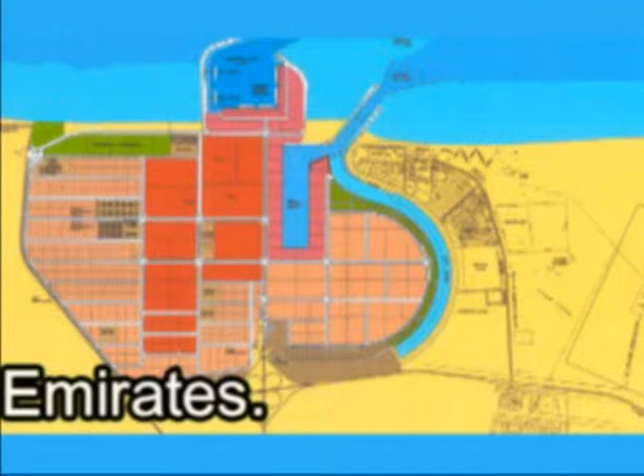Marine Engineering and Services commenced its operation in 1979 and has since extended its operation in 1987 by acquiring the docking facilities. We opened a branch in Dubai Al Jaddaf in 1990 under the name of Al Marine Engineering and Services. Now MES has acquired a new yard in Hamria Free Zone in Sharjah, where the entire existing docking facilities at Al Layya have been transferred. We hope for a brighter future and acquisition of business over here.

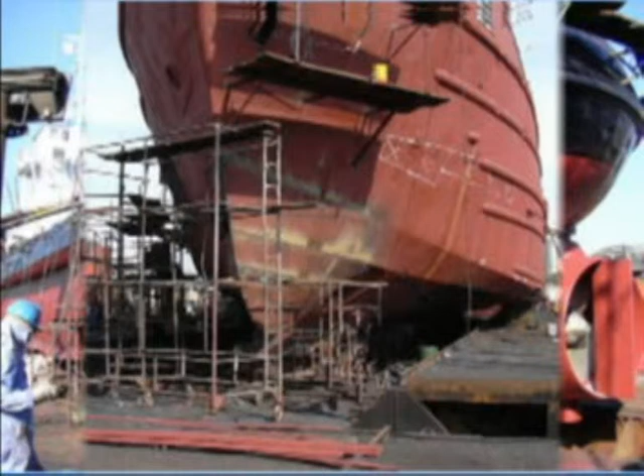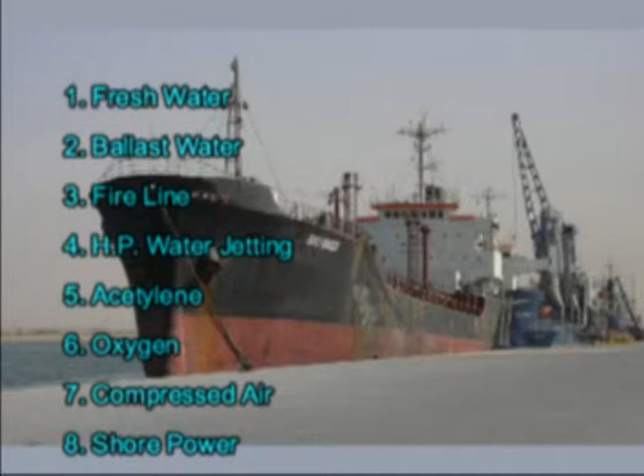Services at dry dock and repair berths. At the afloat repair berths: freshwater, ballast water, fire line, high pressure water jetting, acetylene, oxygen, compressed air, shore power, shock drainage, and tank cleaning.

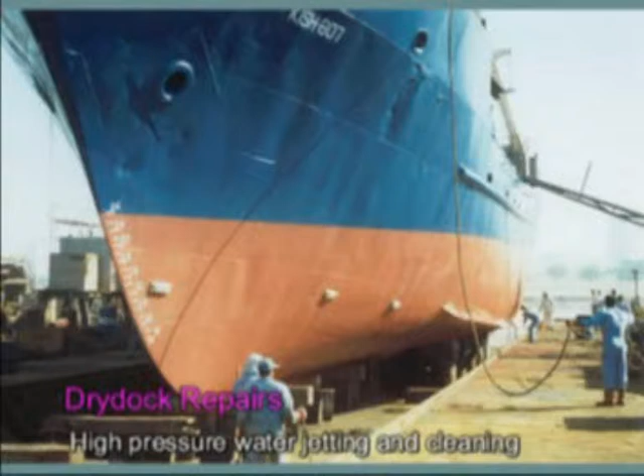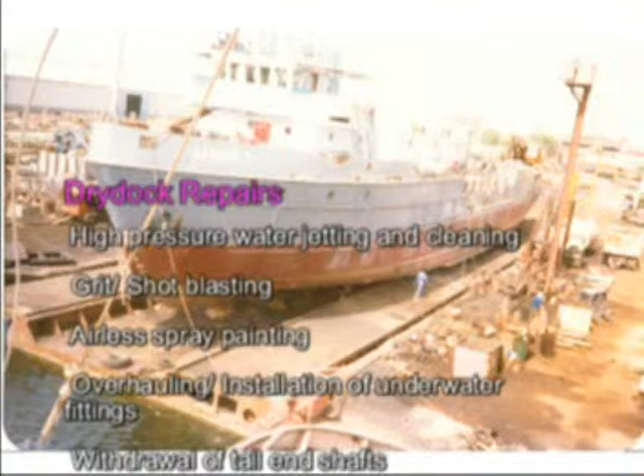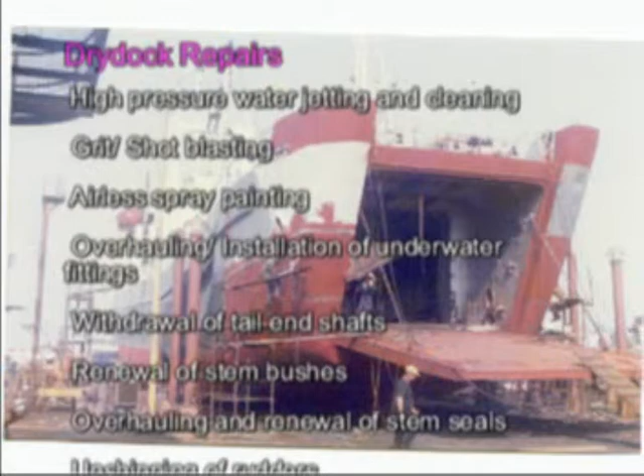Dry dock repairs: high pressure water jetting and cleaning, grit shot blasting, airless spray painting, overhauling and installation of underwater fittings, withdrawal of tail end shafts, renewal of stern bushes, overhauling and renewal of stern seals, unshipping of rudders, checking and correction of alignment, replacing of rudder bushes, replacement of anodes, installation and repair of cathodic protection systems, non-destructive testing methods including radiography, ultrasonic, X-ray and magnetic particle testing, annual intermediate and special surveys, and load line inspections.

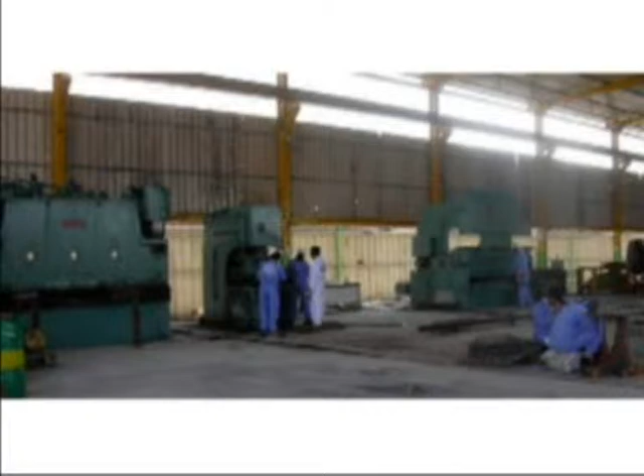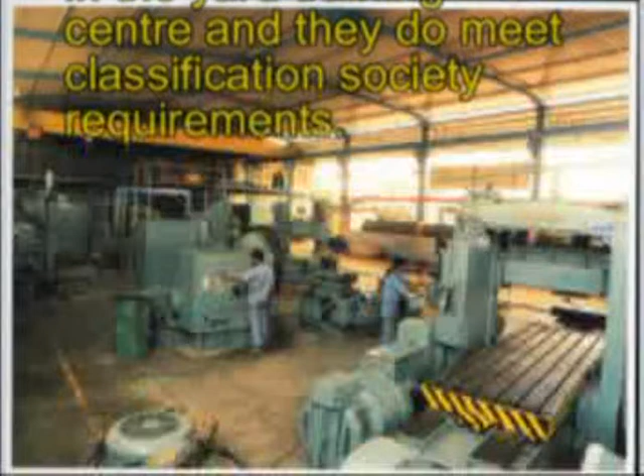Fabrication shops are equipped with submerged arc welding, MIG, TIG and MAG welding instruments, profile cutting machines, plate rollers and hydraulic presses. All these facilitate the speedy completion of steel renewal work undertaken. Our welders are trained in the Yard Training Center and meet Classification Society requirements.

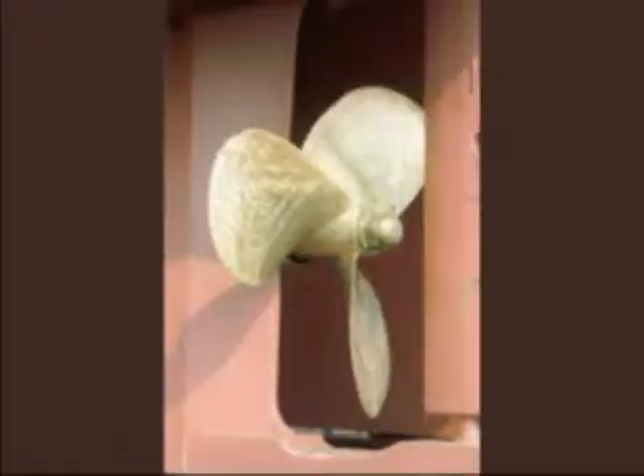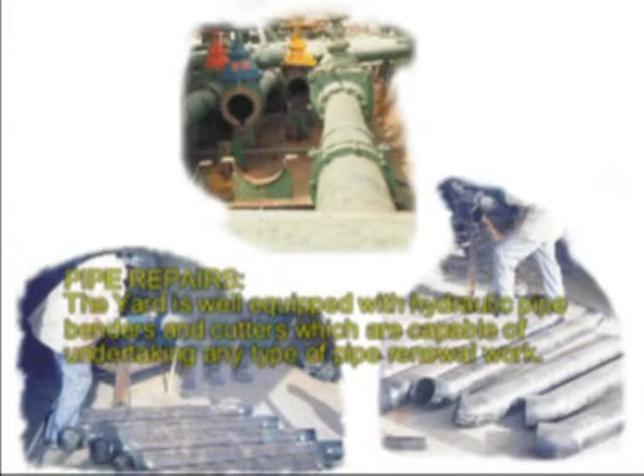Pipe repairs: the yard is well equipped with hydraulic pipe benders and cutters, which are capable of undertaking any type of pipe renewal work.

Electrical repairs: servicing and rewinding of generators and motors, replacing navigation lights and rewiring, installation and reconditioning of switchboards. Diving services: inspection of bottom damage and repair.

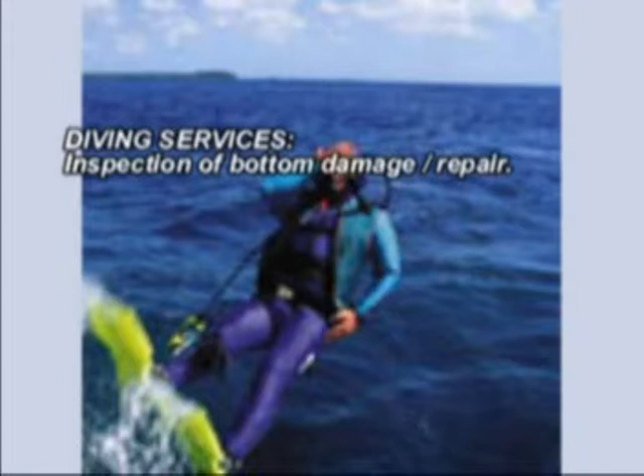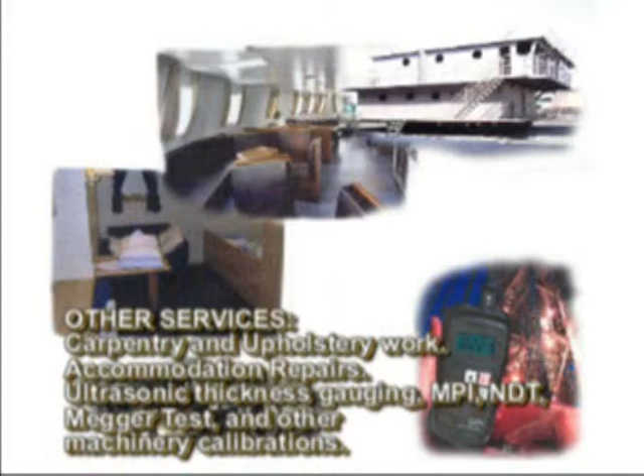Other services: carpentry and upholstery work, accommodation repairs, ultrasonic thickness gauging, MPI, NDT, Megger Test, and other machinery calibrations.

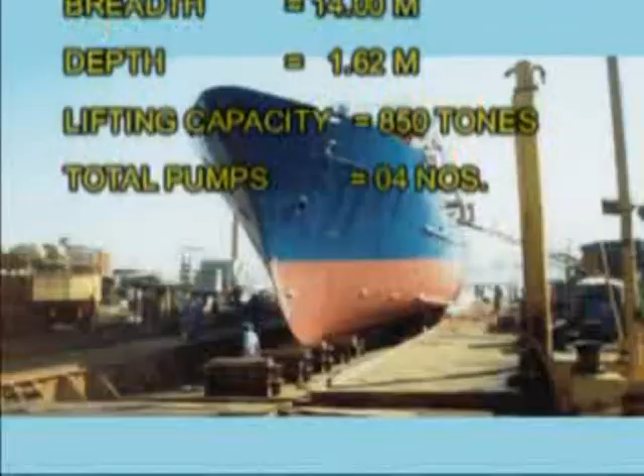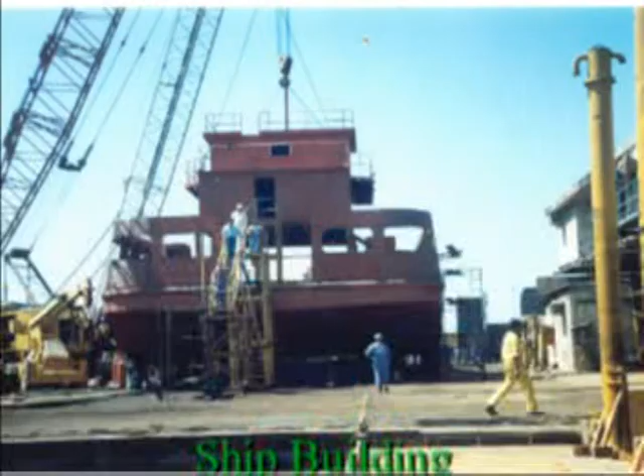Our yard is second to none in the Emirate of Sharjah for its size, equipment, and facilities to deal with all kinds of marine, onshore and offshore, and industrial repairs, renewals, maintenance jobs, structural fabrication, and large storage tanks. This yard is an associated company of Far Group of Sharjah, which incorporates the biggest fleet of tankers, from supply boats to super tankers, in this part of the Emirate.

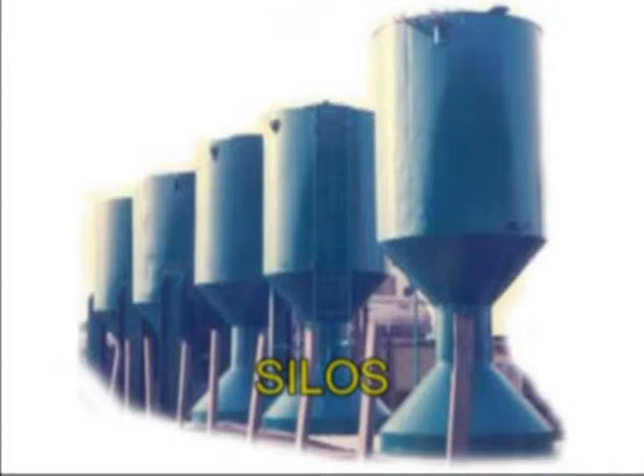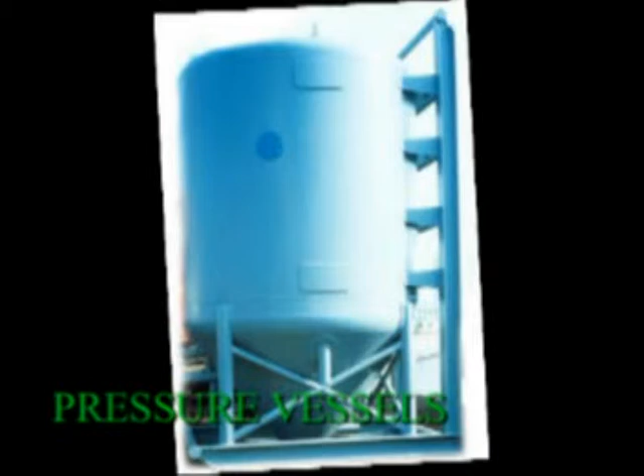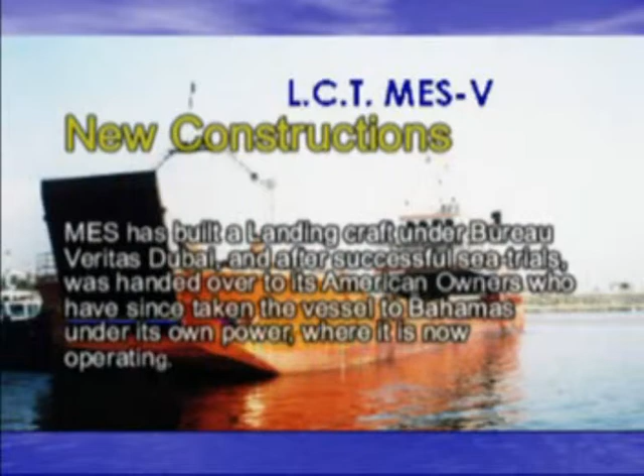MES has built a landing craft under Bureau Veritas Dubai, and after successful sea trials it was handed over to its American owners, who have since taken the vessel to the Bahamas under its own power, where it is now operating.

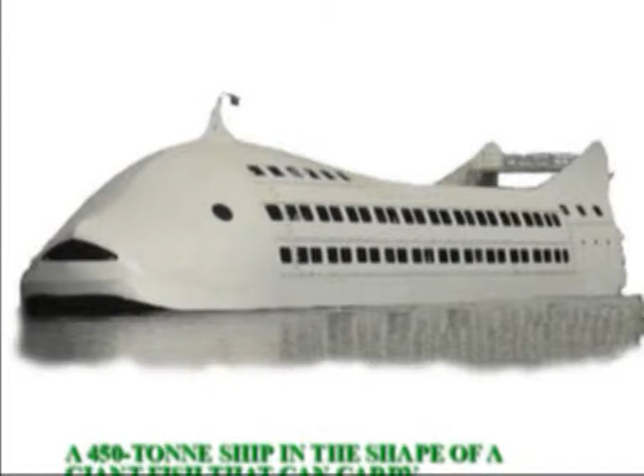A 450-ton ship in the shape of a giant fish that can carry 800 people is being built in Sharjah.

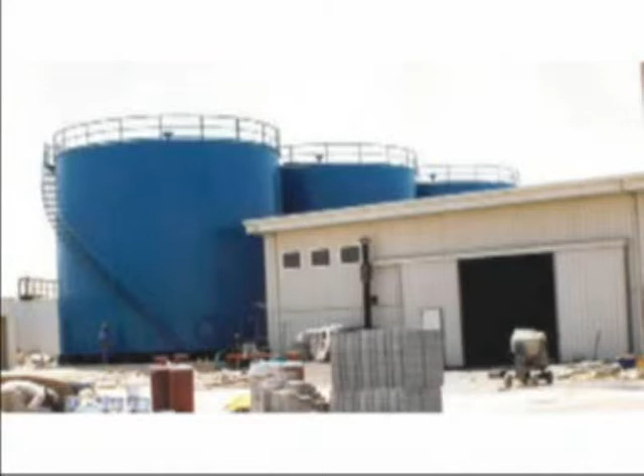MES carried out a successful turnkey project of a lubricating oil blending plant at Mussafah, Abu Dhabi for ABS Lubricants. Commissioning of the plant was done on 24th June 1998.

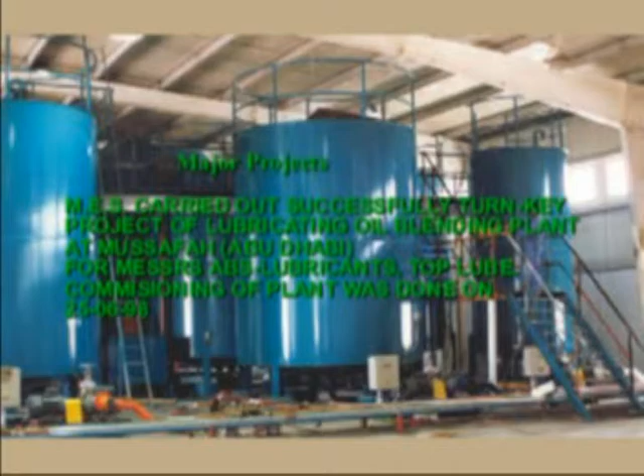Oil loading jetty for Sharjah Oil Refining Company: fabricated and erected all structural steel work of the loading platform with access bridge, mooring dolphin, berthing dolphins, and pipe rack.